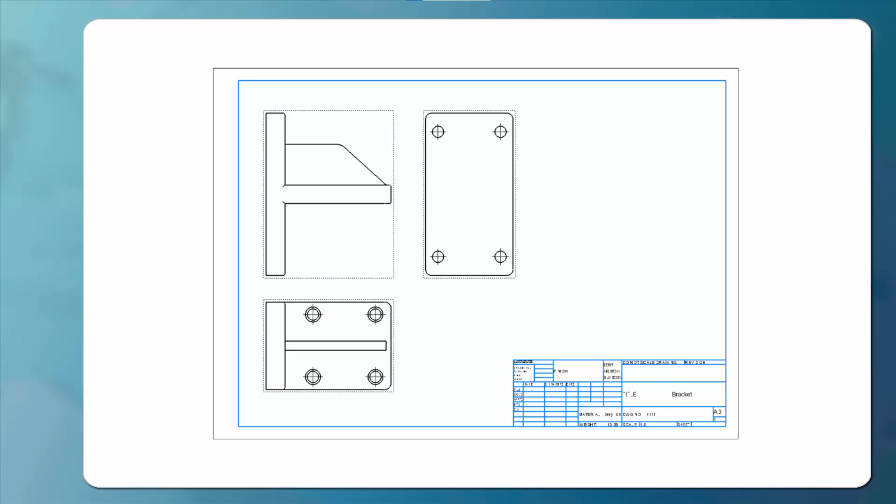In this video, we'll replace the left view with the right view, find the optimal isometric view, and arrange all views in the drawing. Let's move the views to fit them within the drawing sheet. If you try to drag the front view, all the views will move together. If you try to drag one of the other views, you can move them along the projection lines.

Since the first angle orthographic projections are used, the left view is generated on the right. But in this case, the right view would be more informative. Actually, we don't need all these views. Let's remove them and then create views we need.

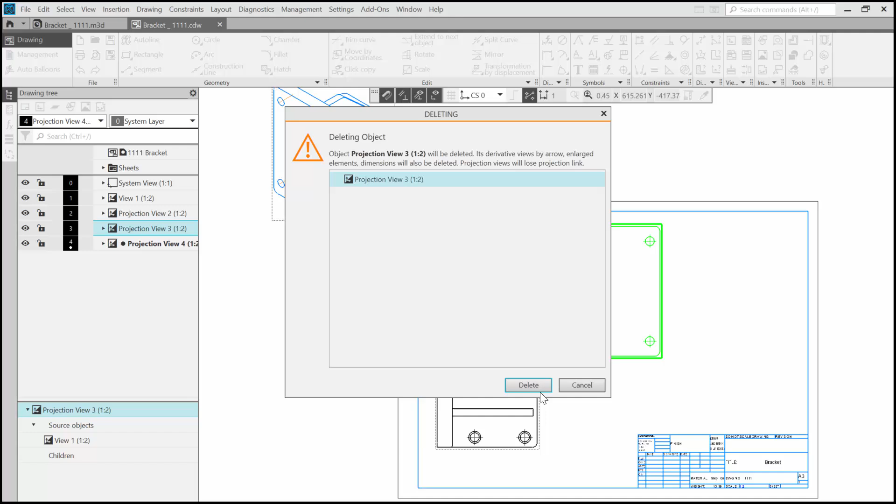To select a view, click on its dotted frame. The view will turn green. Make sure you have selected the entire view, not just an element of it. Then press Delete. Confirm the deletion. Repeat for the views you don't need.

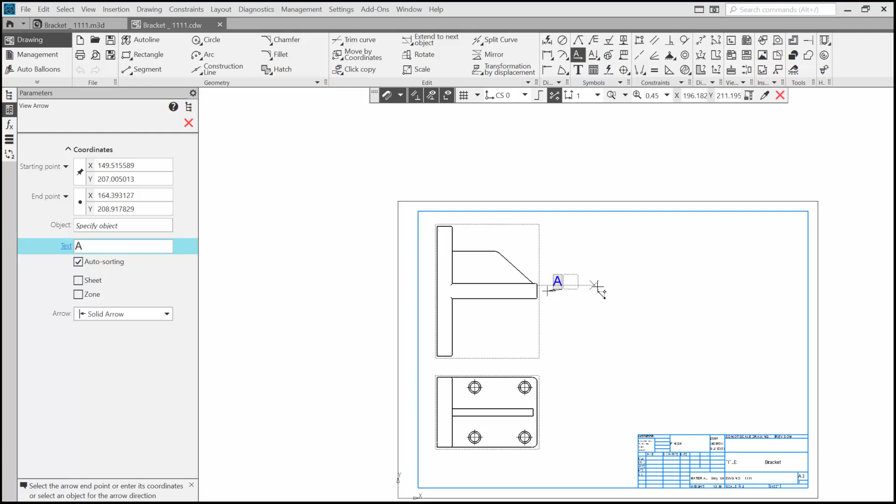Now let me create the right view using the View Arrow command in the Symbols toolbar. Click it. First, click to place the arrowhead. The preview of the symbol appears. Click one more time to define the arrow's position.

Notice that the View in Arrow Direction command has been run automatically. Click to place the view. I'll move all the views a bit.

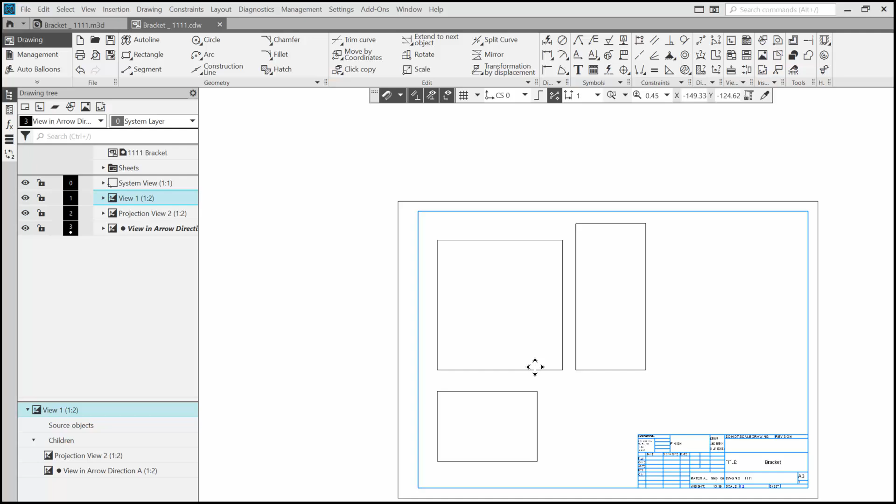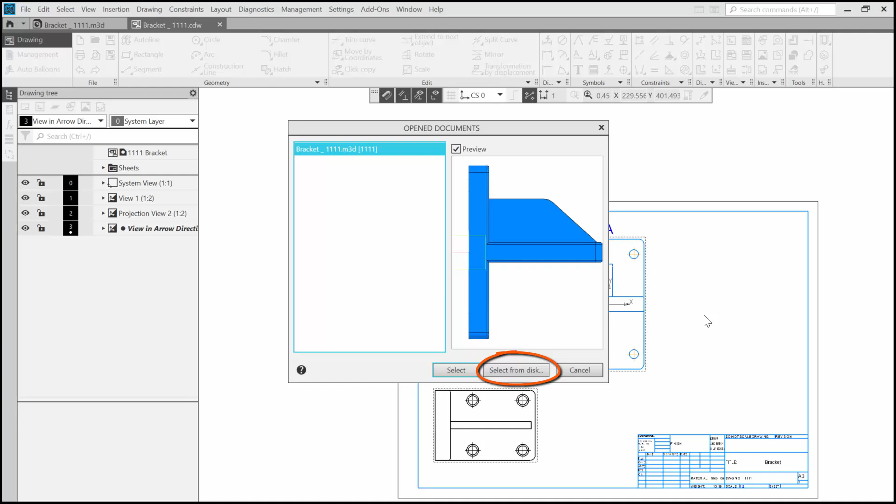Add an axonometric view. There are several ways to create such views. First, let's start the Model View command in the Views toolbar. Since the Bracket document is opened now, the system suggests selecting it for views creation. However, if you need another model, you can click Select from Disk. We need the bracket, so we'll select the bracket. Show the Source Model window.

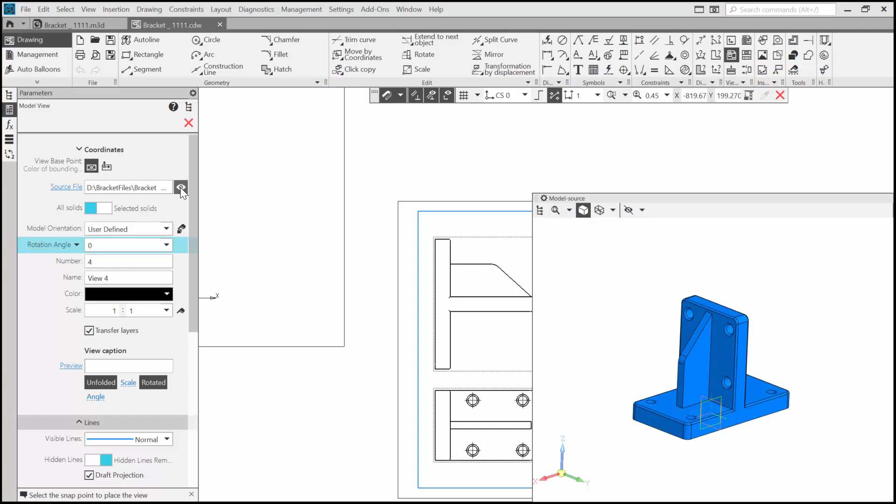Here, rotate the model to the desired position using the right mouse button, and then click Fix Custom Orientation. Now you can see User Defined in the Model Orientation field. Let's specify the scale and place the view in the drawing.

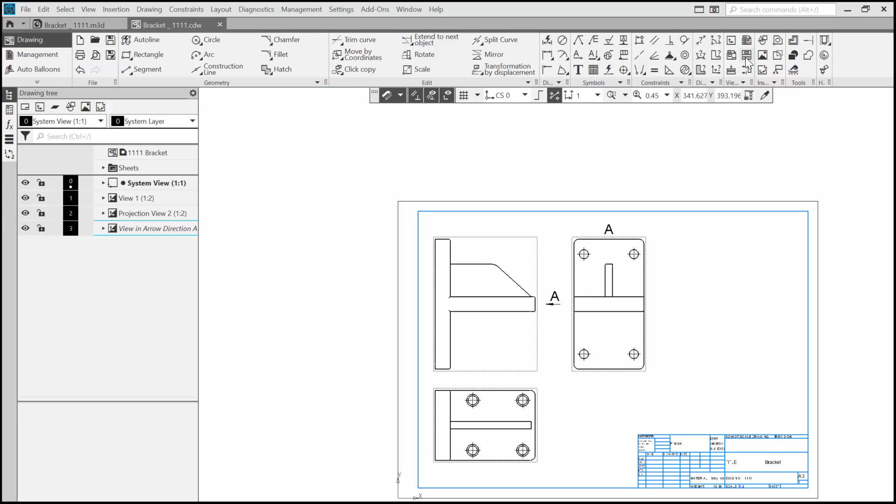Stop the command. If you want to add exactly an isometric view, you need a different approach. Let's remove the last view. Click Projection View. Click on the front view. If you move the cursor diagonally from the front view, you can get different isometric views. But I don't like any of them.

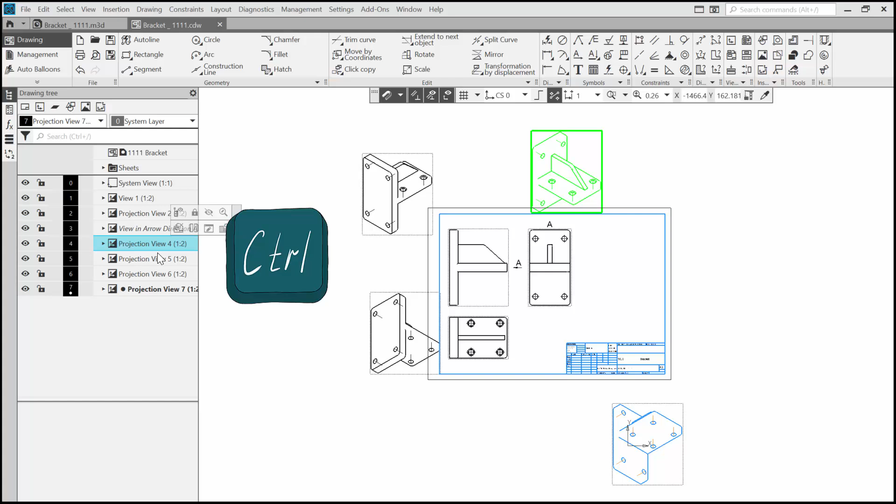Let me delete these isometric views. I'll select them in the tree. Hold down the Control key to select multiple objects. First, I create a projection view from the front view. Then I stop the command and start it again. Note that you can start the last used command from the context menu.

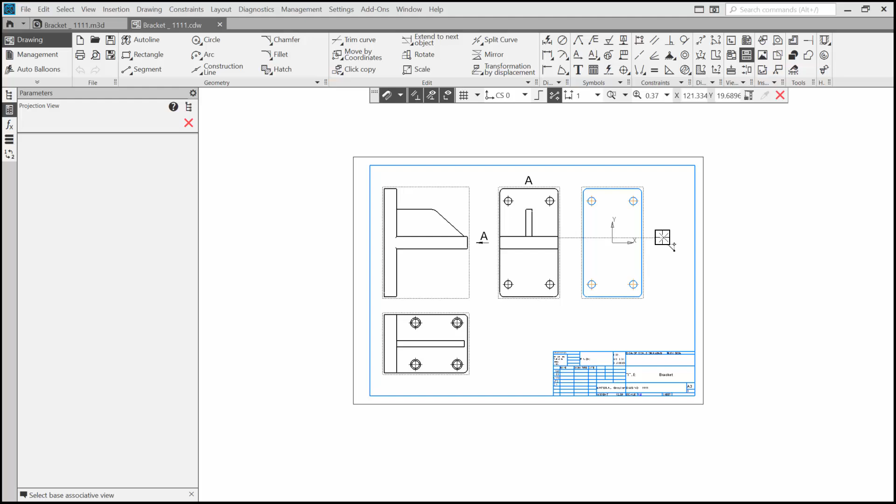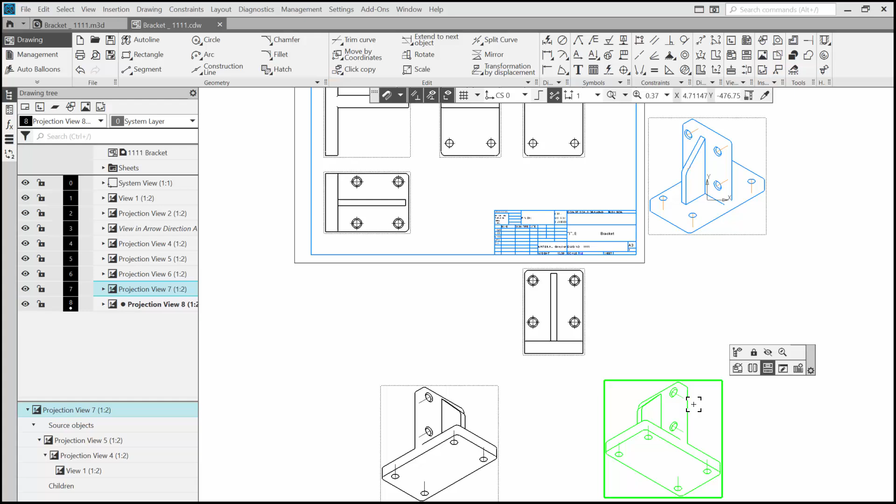This time I select the left view. And now I'll create an isometric view using the last view as a base. Actually, I'll create several of them and then choose the best one. Stop the command. Select all unnecessary views. Click their frames using the Control key. Place the isometric view on the drawing sheet.

Let's change some settings for the views. First, left-click on the view frame to select it, and then right-click on the view to open the context menu. Select View Parameters. You can see the same view parameters that you saw when we added the views. Open the Lines section if it's closed. Turn this switch to the hidden line position.

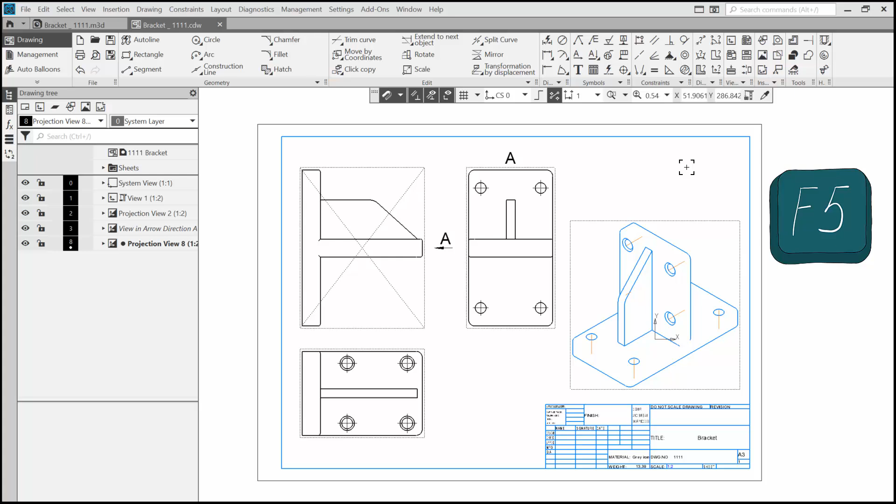Confirm. Note that the view is crossed out. It means that you need to rebuild the view. You can do it using the Rebuild command in the Quick Access bar or by pressing the F5 key. You can see the invisible holes in the front view.

Repeat for the other view. I've right-clicked not on the view and have accidentally called up the wrong menu. This view needs rebuilding now. Let's try a different way to rebuild it. It can be useful when your drawing is complex, and rebuilding all views would take a lot of time. You can rebuild just one view. Select the view, right-click to open the context menu, and select Rebuild View.

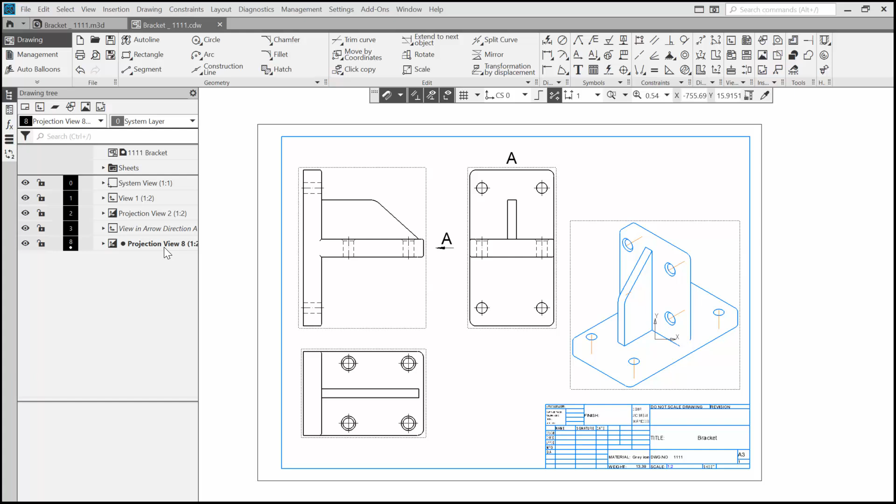Let's adjust the isometric view. You can also right-click on the view name in the tree to display the context menu. Turn on the transition lines and remove the axis.

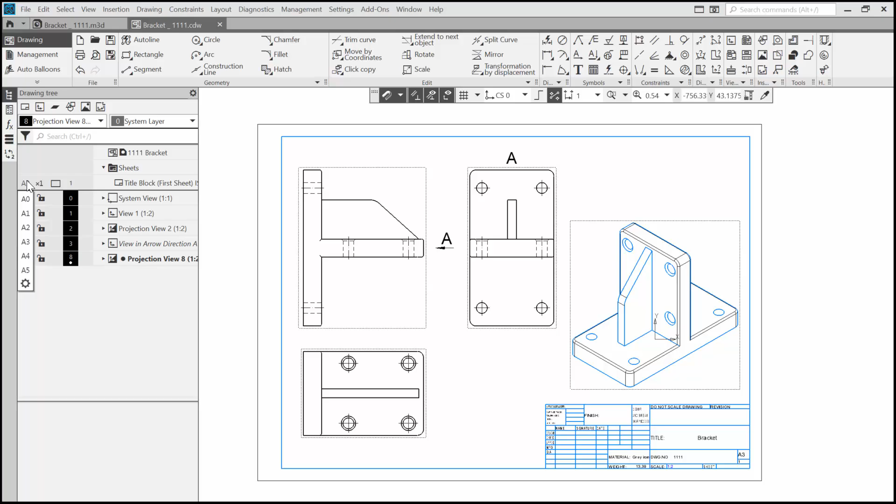Notice that you can modify the drawing sheet settings at any time. Click the Sheet section in the tree to open it. Here you can change the sheet size and the sheet orientation.